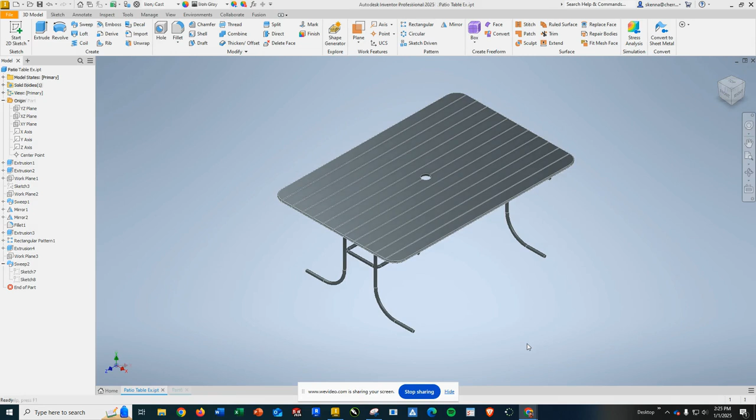Okay, to start out with, we're going to go ahead and start with a new document, and we're going to drop down our origin area, and we're going to use our view cube to look at our ISO view so we see the front, the top, and the right side.

This time we're going to start on the top plane, which is the XZ plane. So that's going to be where we're going to start our sketch.

Okay. Now I am going to rotate my view, that way I have top and I have the front at the bottom of it so that I know where I'm at. So I'm going to rotate it so I can read top upright, and then I'm going to start with a center rectangle.

So 2-point center rectangle. My first point is in the dead center because I will be lining other stuff up with the center as well.

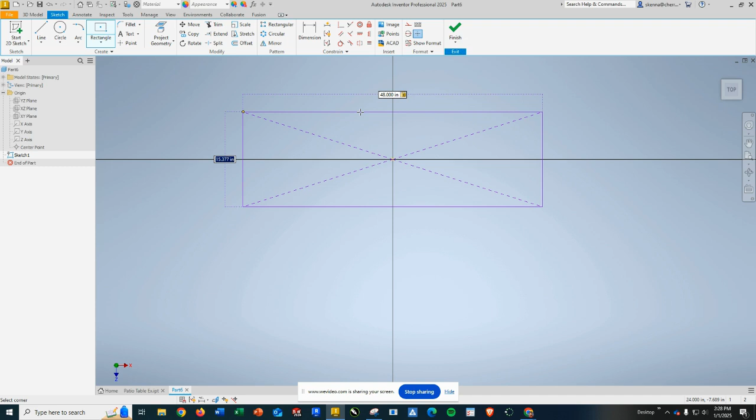Now we're going to go ahead and zoom out some because the width of our table is 48 inches or 4 feet. I'm going to tab over, and the height is going to be 72 inches, which is 6 feet. So that will create our 4x6 patio table top.

The tabletop is what we're starting with. The next thing we're going to do is we're going to use our sketch fillet. So fillet is just a simple way to round corners. So we're going to use our sketch fillet tool.

We're going to set it to 4 inches, and we're going to add a sketch fillet. It doesn't like that, so let me do that differently.

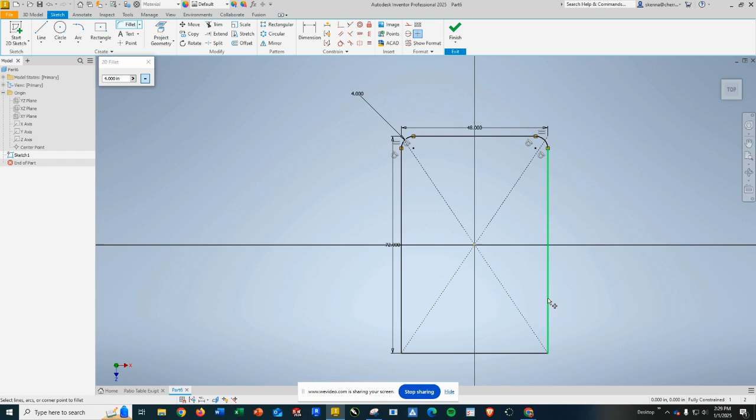We're going to add the two lines that surround each corner, and we're just going to kind of go around in a circle. The nice part is it dimensions it once for us, and that way the rest of them are good to go. So we're going to accept that as the completion of our fillet tool.

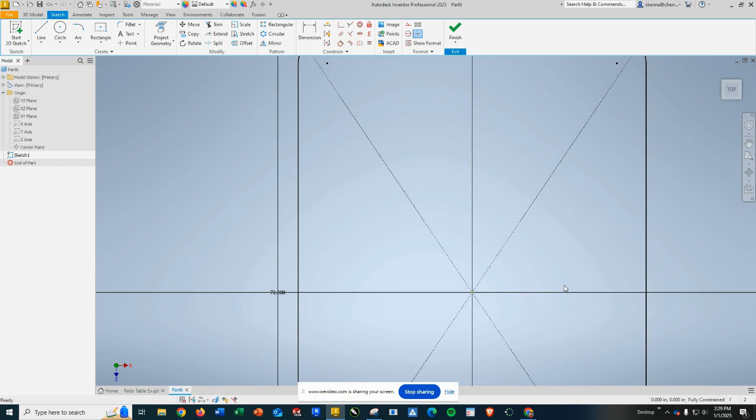And we're going to go ahead and also finish our sketch. Again, it kind of zooms out. I don't know why it picks the scale it zooms to, but it does.

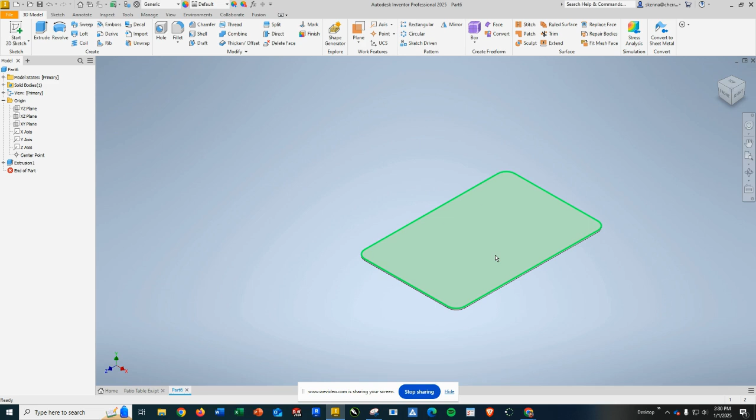We're going to go ahead and extrude in an upward direction. Instead of being 1 inch, we're going to do 3/4 of an inch, which you can do as 3/4 or 0.75. Either way, that is our 3/4 inch tabletop.

The next thing we're going to do is we are going to switch to our YZ plane, which runs through the right, which would also be called the right plane because it runs through the right hand side of that.

So I am going to start a 2D sketch there. And the next tool I'm going to use is I am going to go back to rectangle, but I'm going to go back to a standard 2-point rectangle. I'm going to zoom in a little bit, kind of more to the left side of my screen. And I am going to draw a rectangle starting on the edge.

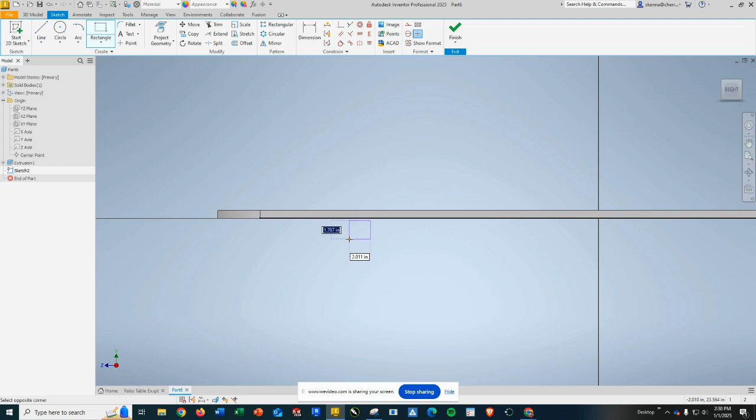Sorry, it was flashing, so I thought that was on the edge, but it is not. So I'm going to hit escape and try again. So we're going to go down to the edge. There we go. And this time, the height of it is 0.75 or 3/4, either way, and the width of it is 3 inches.

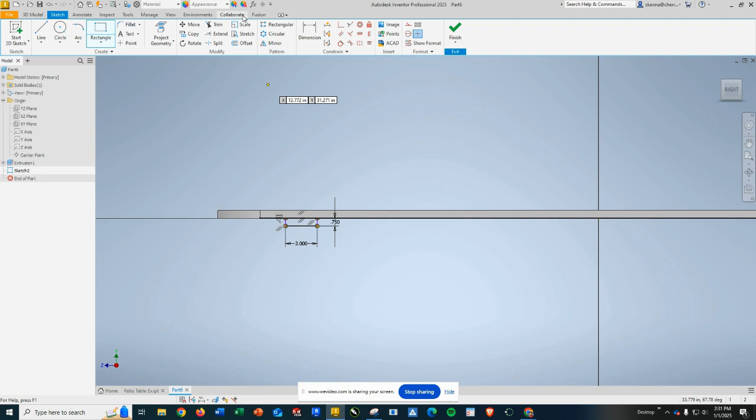Now we're going to get our dimension tool because we're not quite fully defined. And we are going to add a dimension from this corner or the line to the middle, so I can get the midpoint there. So I'm going to add this dimension, and that dimension is 24 inches. So we'll move it in just a little bit.

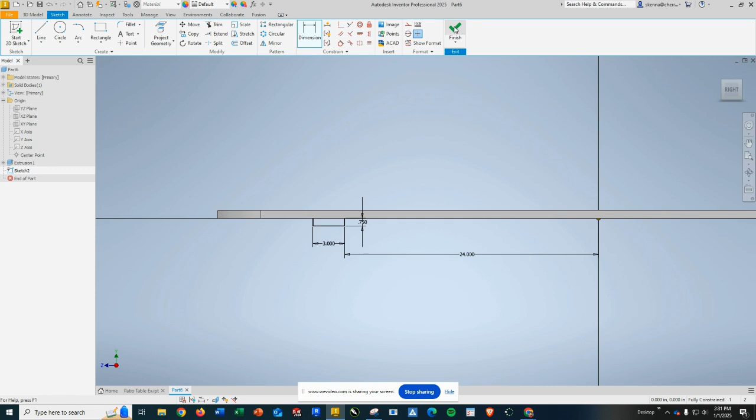Now what we're going to do is we are going to use this to create the support where the legs attach, and we're going to turn this into a slatted table, so those slats would need to mount to something as well. That's the part we're creating right now.

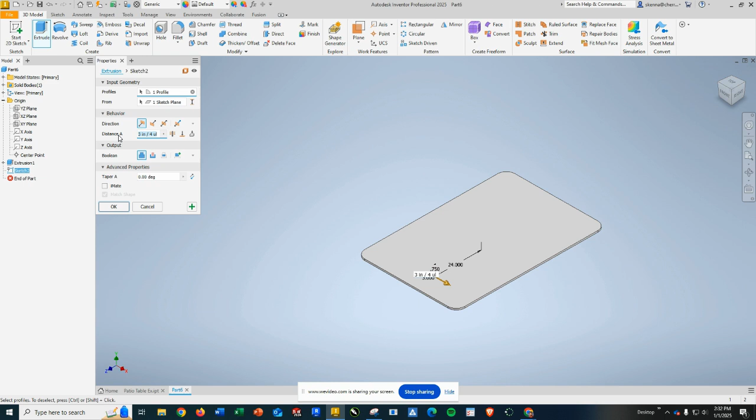And for this, we're going to go ahead and click extrude with it selected. The distance is going to be set - I don't know why it makes the fractions look weird like that, but it does - to 46 inches.

So instead of 48, I'm going to go back and fix that. By the way, if you make a mistake, you can always right click on it and hit Edit Feature to go back to your settings.

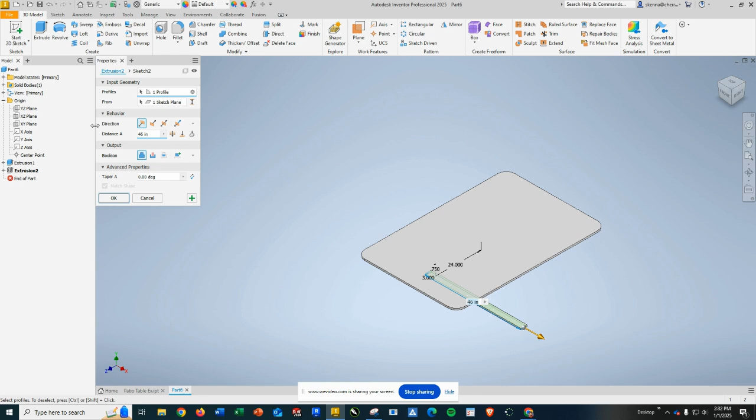46, we'll put it just shy about an inch in from either side of the table. You can see mine sticking out because it extruded only in one way. This is one of those times where we actually want it to go in both directions equally, or what they call a symmetric extrude. In SolidWorks, this is called a mid-plane extrude.

So as you can see, it's going about an inch in from either side, which is exactly what we want. So now I can hit OK, and as you can see, the change has been made. So I have my support underneath.

And we're going to work on just one side, because one of the other tools I'm going to show you that wasn't listed in the title of the video is Mirror. Mirror is a great tool to use when you've got assemblies or groups of features that are the same on both sides. So we'll get to that.

So you don't need to create another one of these - we're on the front side of the table here. You don't need to create another one on the rear side of the table. So what we are going to do, though, is we do need a surface to draw the profile of the table leg on.

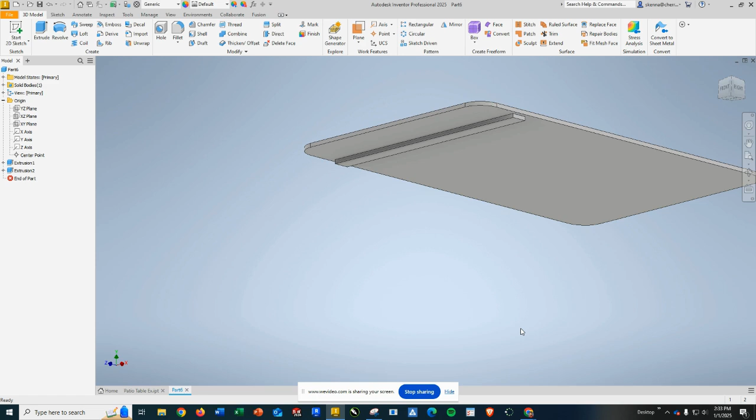And to do that, we are going to come over to Work Features and click the Plane tool. Now, even though it doesn't necessarily prompt for things, what it's looking for is two references or more to use to define this plane. And you'll know that it defined it because the tool will shut off and the plane will appear, and it will also appear in your file tree.

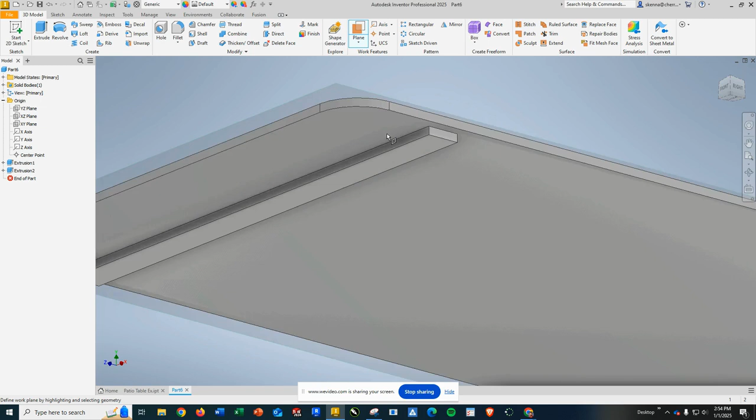It did take me a couple tries to remind myself how I did this the first time I designed this table, so don't worry about it if my numbers don't match your numbers.

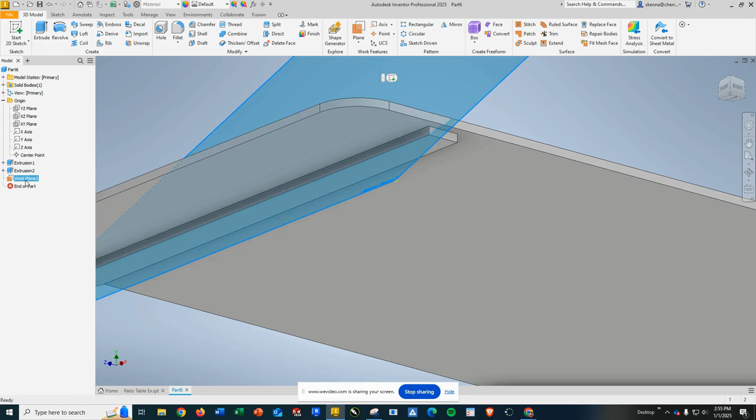So the first thing I'm going to click is one side of the support, and I clicked the wrong side, so we'll undo that, and we'll click this one. And it made me a plane that I don't want, so I'm going to go ahead and try that again.

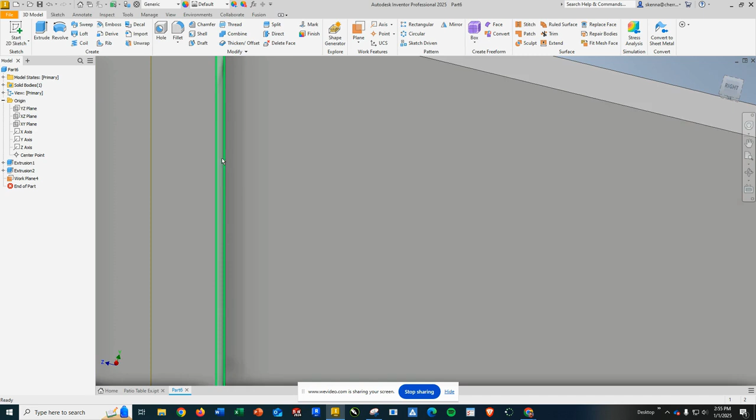So Plane tool, side of the support. I am then going to rotate - I can grab my tool here, I'll rotate this around - and I'm going to click the other side. I'm going to be real careful and go ahead and zoom in the other face of the plane, which created a plane for me that is in the exact center of that support, defined by the support.

So the nice part about doing it this way is if I ever chose to move the leg assembly in or out, I could just change where this table support was created, and the legs would move with it. So that's a real nice feature.

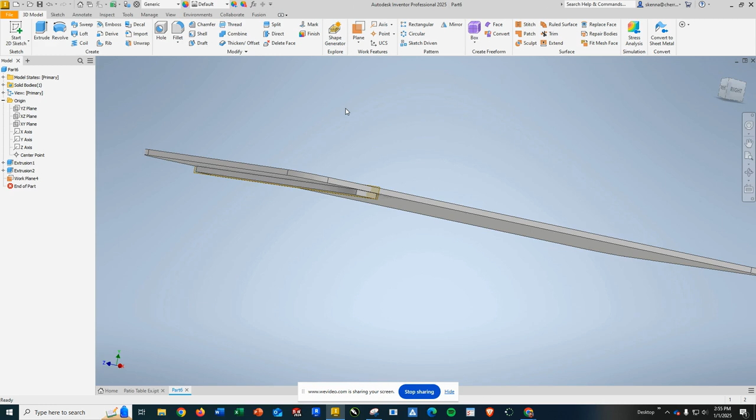All right, so I'm going to go ahead and click this work plane. And again, if your number is different, if you did it right the first time, you won't have a problem. So you can just go ahead and click that and start your 2D sketch.

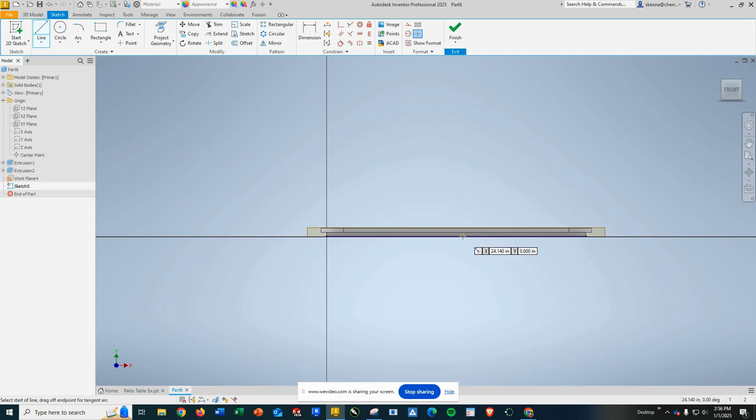I first am going to draw a center line because I want to space this off of the middle. So I'm going to go ahead and grab a line tool. I'm going to get on this line and slide over till I find the defined midpoint, which should be right in the middle somewhere. There we go. I knew it was there because it said the 24 inches, and I am going to draw this down.

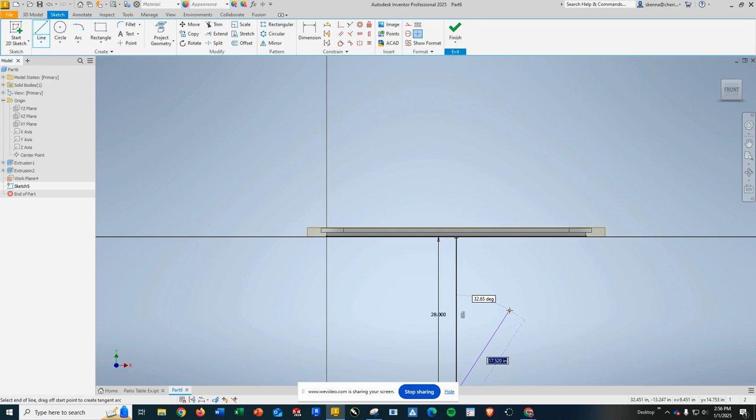The overall height of my leg from point to point, which is 28 inches at 90 degrees, which is perfect. All right, and then I'm going to go ahead and click the line, and I'm going to change it to be a construction line, so it is dotted. That is perfect.

Now we're going to be kind of back and forth with some tools here as we draw this profile. So we're going to be switching between line and tangent arc. So we're going to go ahead and grab our line tool.

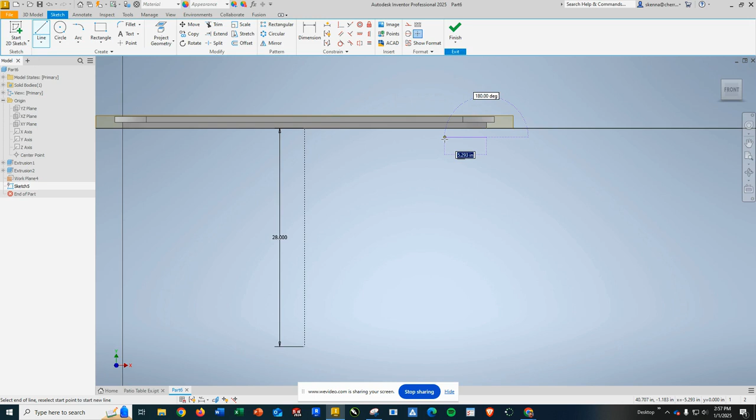I'm going to start straight below this edge. Draw this over - make sure you're going horizontal - and we want that to be 9 inches. I'm now going to switch to my tangent arc.

Click my line here and just kind of draw a tangent arc. I'm going to get close to 90 degrees. Doesn't have to be perfect.

I'm going to go ahead and start my line. I'm going to click on the end of that. This does need to be perfect, so we do want it to be straight vertical because we're going to use it to define our arc there. But this needs to be a 12-inch line.

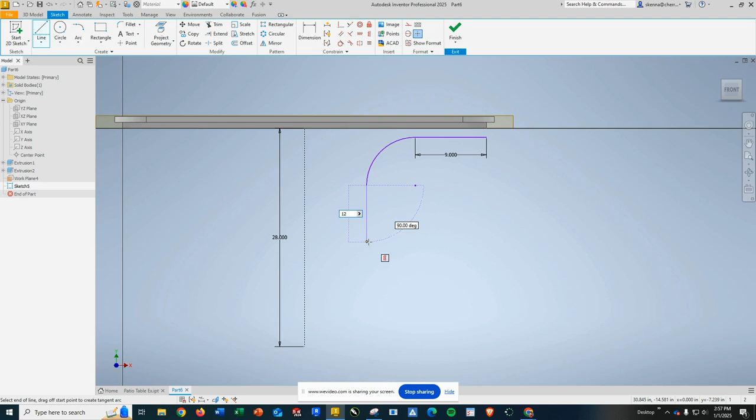Next, we're going to switch to our tangent arc. Click that same line, come around again, 90-ish is fine. We're going to get our line, and we're going to get on the end of it, and we're going to come out, make sure we're horizontal, 7 inches.

Now we're going to apply a few different constraints to our thing here. So just to be clear, when you click on the arc right now, it's only tangent at the top. We want it tangent at the bottom as well. This one, again, it's tangent where it started, but not where it ended. That's probably a better way to say that.

So I'm going to start my tangent option, and I'm going to go from arc to line to add that tangent at the end. And again, down here, arc to line to add tangent at the end.

Once that is done, I'm going to go ahead and click my vertical constraint. I want to put a vertical line between the end of the support and the start of the profile. I am also going to grab a horizontal and put the end of my construction line horizontal to one of the endpoints of this lower 7-inch line as well.

With that, I am going to dimension from the center line over and set that at 6 inches. And it's going to tell me one dimension needed.

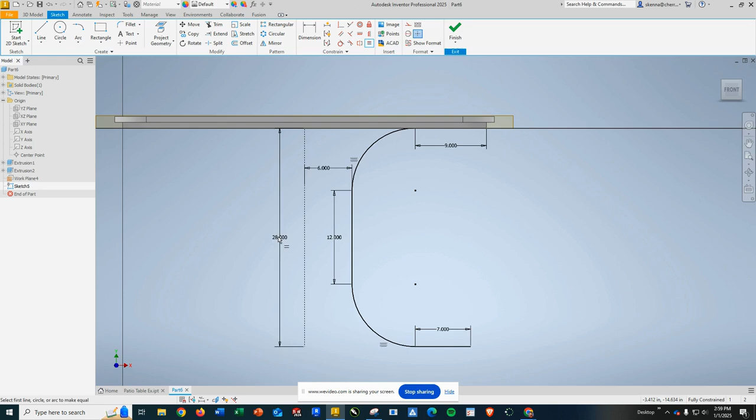Now I am missing something, and it was an incorrect measurement on my part. So in order to fix a measurement, let me get out of the constraint. If you double click on it, this was not supposed to be 28 inches. This was supposed to be 28.5. So lucky for us, we found out how you go back and correct a measurement.

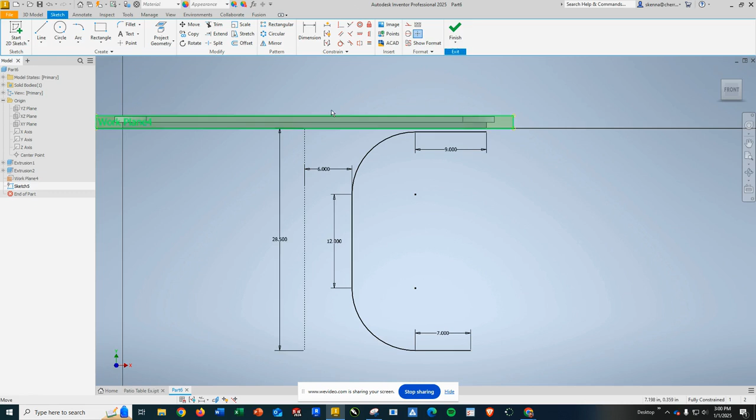So with that, that should leave us this profile fully constrained in what I'm going to call the easiest way possible. There would have been some measurements we could have added that would have done the same thing, however, this is the easiest way possible. Now I'm going to go ahead and finish that.

I am going to add another work plane because I have to be able to draw 90 degrees, or perpendicular, to this line at the very end of it. So when I click my plane, I'm going to click two things: this line, and the point there. And it added a work plane for me that is perpendicular to the line at the end of it, which is perfect and exactly what I want.

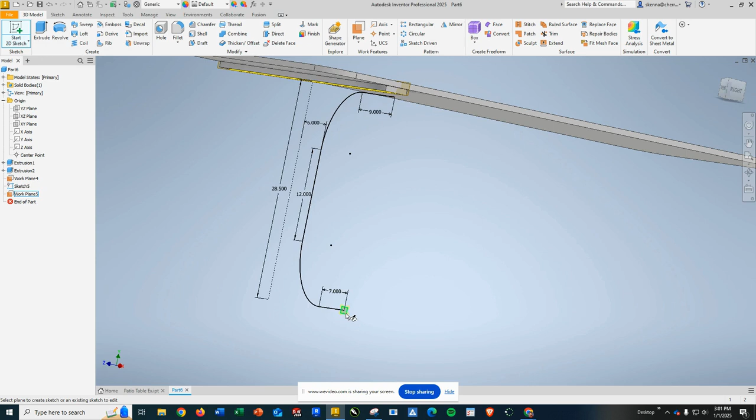So the next thing I'm going to do is start a 2D sketch again on that plane, which I'm going to zoom in on. So sketch 6 is on that plane. I'm going to go ahead and grab my tool, and we are going to go on the very end of this line and draw a 1-inch circle.

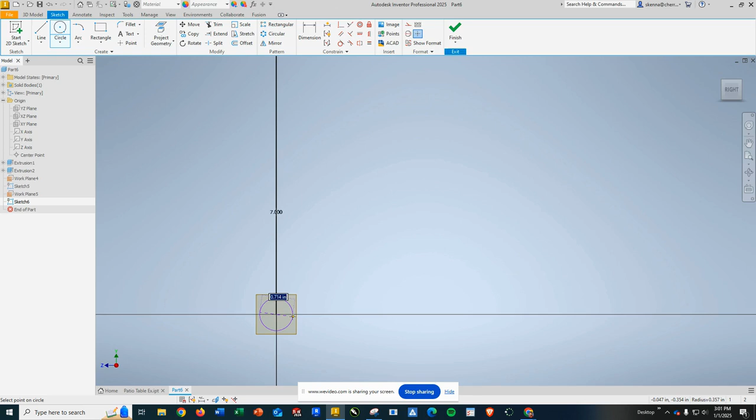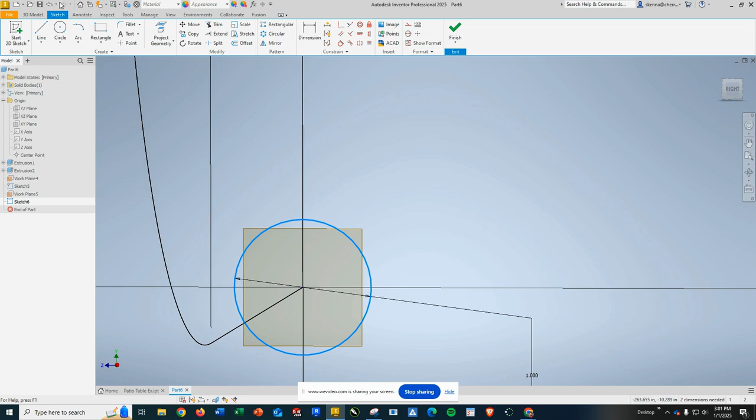Which should be fully constrained just by itself because, again, I created it right on there. We're just going to angle this and make sure, yeah, the center point should be on the center point of the circle. So that is good to go there.

We'll go ahead and finish that. And we're now going to use a tool called Sweep. What Sweep does is it takes a profile and moves it along a path, just like it shows you when you hover over it. So when I go Sweep, the first profile is already selected because I had just drawn that sketch.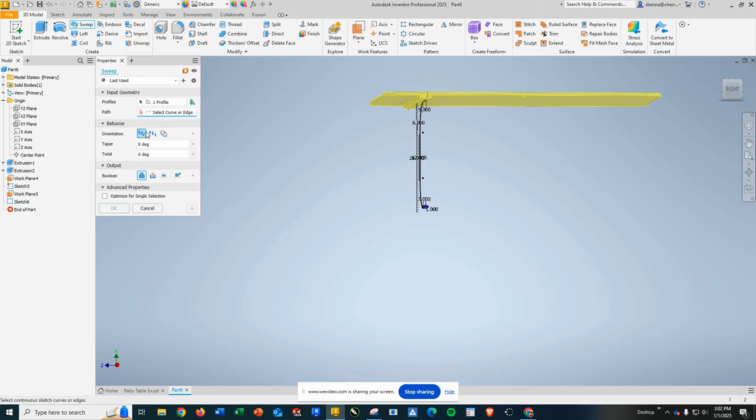Now, when I select curve or edge, I should be able to rotate my view and pick this path right here, and you should get a green preview of it. We do want to make sure it's adding, because that way we know it's touching up at the top there, and it's got 5 curves. I really don't need to worry about taper or twist or any of that sort of stuff, but it's going to add the leg as I need it.

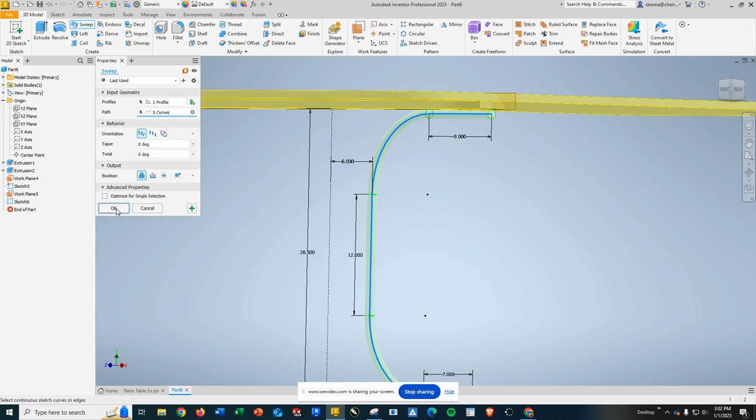So now my table leg is there. It is this nice, really cool leg, and there's a ton of stuff you can do with the Sweep tool.

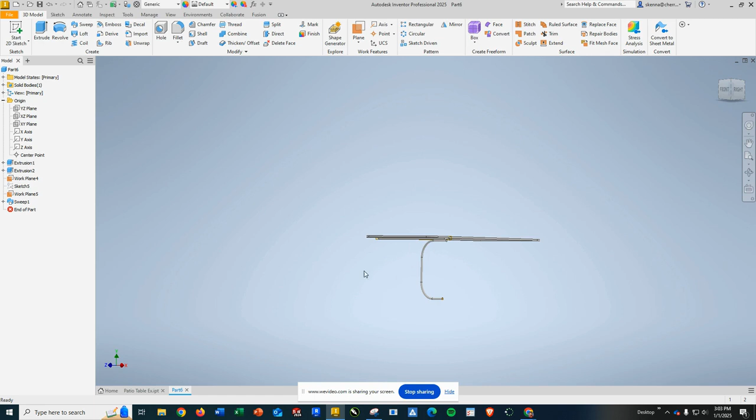So I'm going to take a quick peek just so I know. I want to figure out which plane it is that runs front to back. It's the same plane I drew the profile for the support on, which is this plane right here, which is my YZ plane. And again, that's important to know.

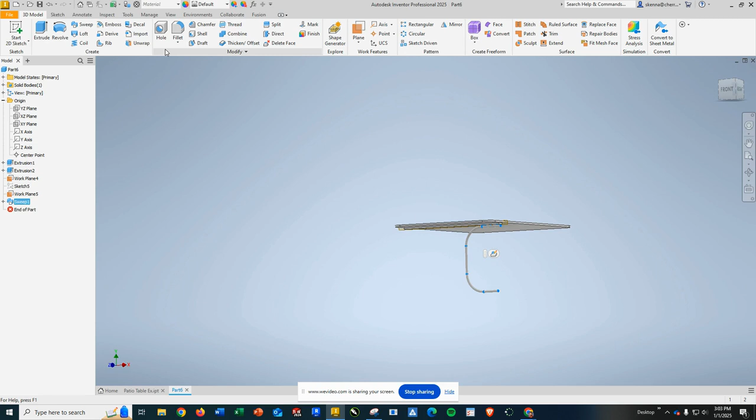So I'm going to have my sweep tool highlighted, and the feature that I want is mirror, and it's over here in the pattern section. So I'm going to mirror, and I can actually then pick, because I already have features chosen, it's now asking me to pick the mirror plane. So I am going to pick, I even forgot which plane it was supposed to be, the YZ plane.

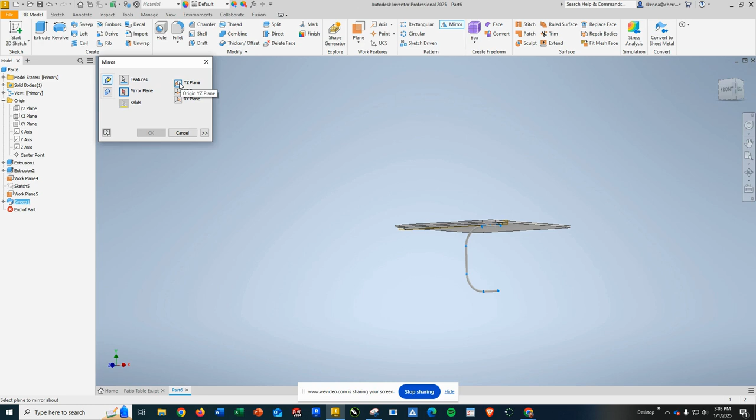And then I'm going to click OK. And now I've got those two on that correct plane.

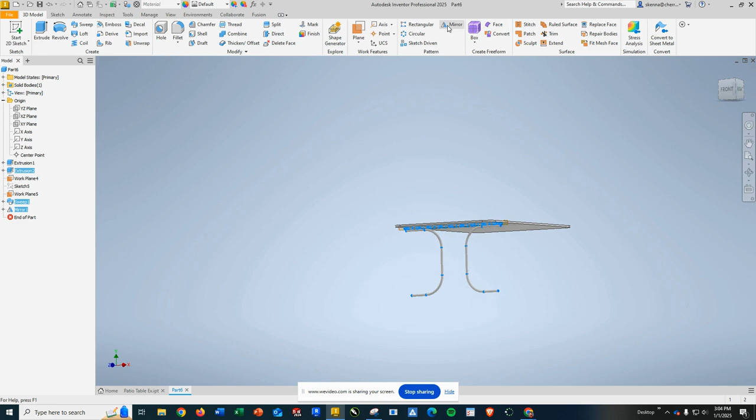The next thing I'm going to do is highlight a few different things. I'm going to highlight extrusion 2, hold control and highlight sweep 1 and mirror 1 to select all of those. My XY plane is the one in the center from front to back, so XY is my mirror plane. I'm going to select those three things, click mirror, and my mirror plane is the XY plane.

So it shows me a rough idea of what I'm going to get, and I'm going to click OK. And now, with a couple of quick mirrors, I've created the majority of my table here. I've got the supports on both ends and all four legs created. The nice part is if I want to make a change, I can go back to one or two sketches and the whole table changes. So that's a great thing there.

Before I do the things to finish the tabletop, we are going to fillet all of the edges of this tabletop. As you can see, once we divide it up into slats, that would be real hard to do—well, it wouldn't be hard, it'd just be a lot of extra work.

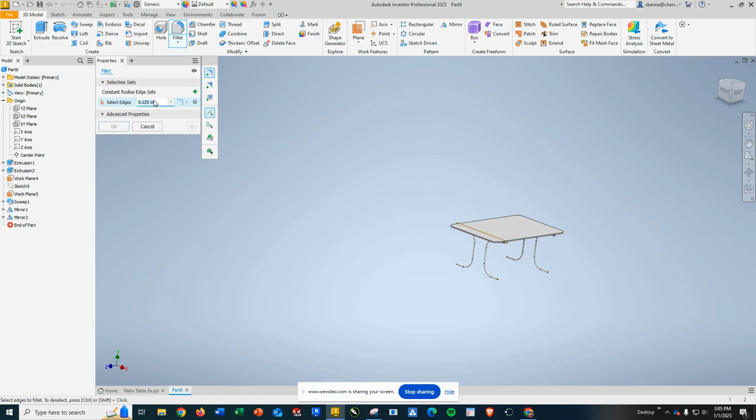So what I'm going to do is go ahead and click the fillet tool, and the radius we're going to set is going to be 0.125.

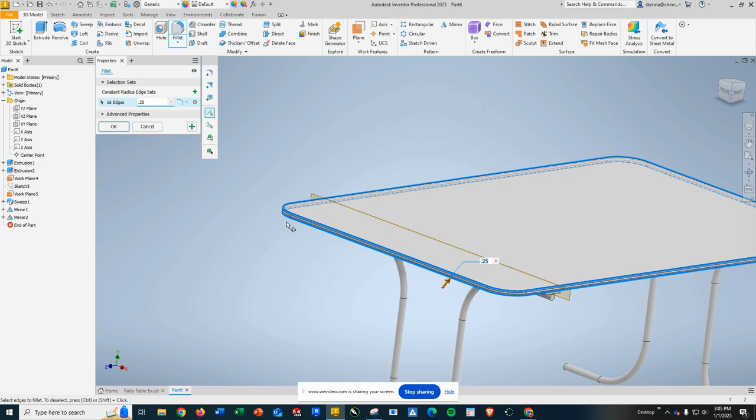Now I can start selecting things. I should be able to select the top edge and the bottom edge of my table. And when I accept that, you'll now see that my edges are all rounded. Even when I divide that up into slats, my edges will all be perfectly good to go.

Now, in the next step, we're going to divide it into slats to give it that patio table look. So I'm going to click on this surface and start a 2D sketch.

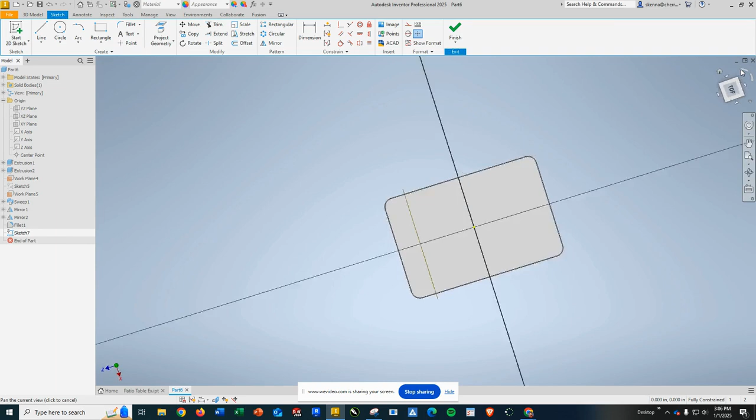Again, just for the sake of doing stuff similarly, I'm going to rotate this up and down. I'm going to take my rectangle tool and draw a rectangle approximately in the right spot, but I'll come back and dimension everything anyway. So I'm going to draw it around where the arc, that 4-inch arc, meets the end.

So I'm going to go ahead and dimension this because I do know the sizes. The dimension is going to be 73 inches long, so it overhangs. Oh, that's the wrong dimension there. This gap is going to be a 1/4-inch gap, so we'll call this 0.25. And when I hit tab, I can get 73.

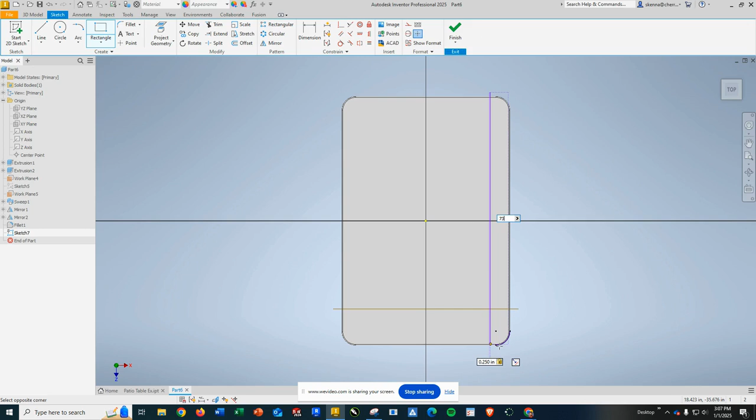So that is that, and all I need to do is add a couple of dimensions up here. I'm going to zoom in and grab my dimension tool. From the top edge, either point or line, to this line, I want a vertical dimension of 0.5. Since I made this an inch longer than I need, now part of it sticks out on both sides, just to make sure we're good to go.

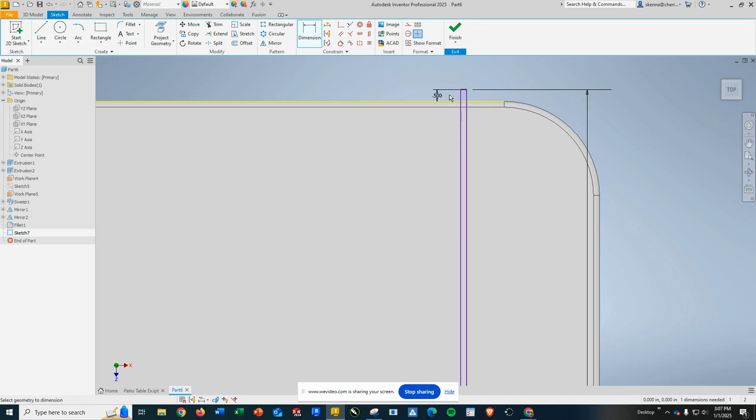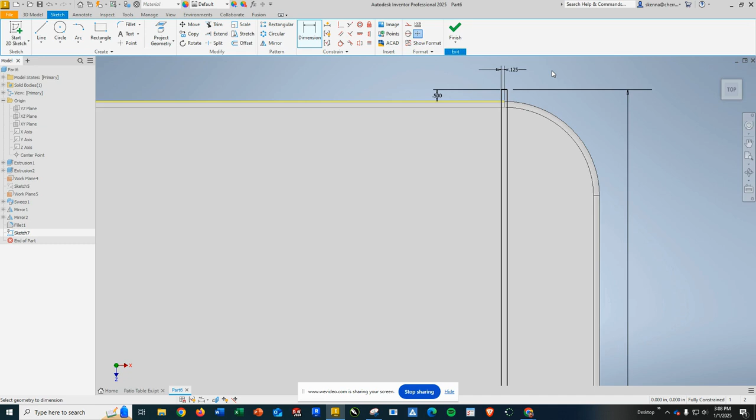My next dimension is going to be from the far line to either this point or that edge. This dimension is going to be half of our 1/4 inch dimension, so 0.125, which puts it centered right where that goes. Now, as you can see, I've got it, and it goes all the way down and across and will give me a complete cut through.

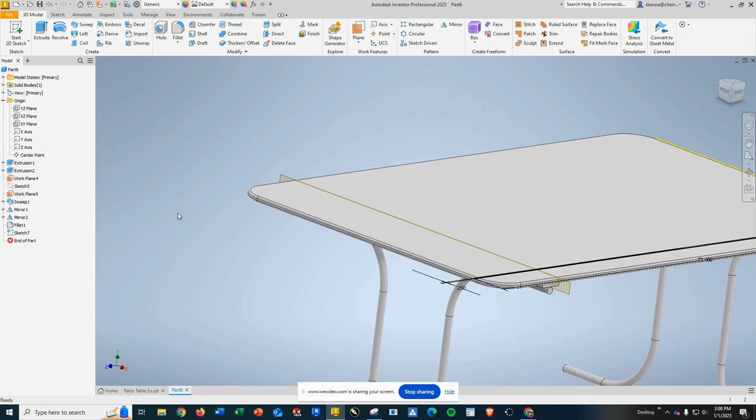This is, again, one of those things where I'm going to do this once and then have the software do the rest for me. So once I'm done with that, I'm going to go ahead and click Finish. With the sketch still active and selected, I'm going to click Extrude.

Now I've got some changes to make because the first thing is this is not going to be adding material, I'm removing material. I'm making a cut. So down here where it says output, I'm going to change to cut. Now it starts to go downward, wanting to go for the whole distance. The last time I did an extrude, it was a 46-inch extrude, so it's now wanting to do that.

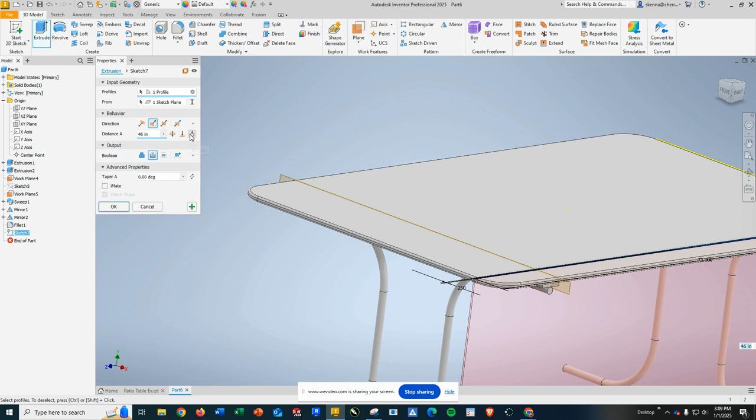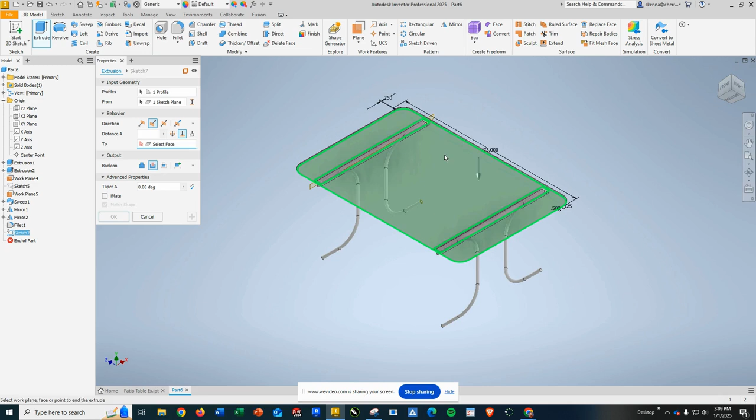Now, instead of giving this a definition, I'm actually going to click the To selector, which now lets me rotate this. Since I drew it on the top and don't want it to cut through my supports, I'm going to move around to the bottom side and say to this surface. So it's going to cut down. And if I swing back around to the top, I can zoom in and see it's going to cut down through this part of the table, but not into the support.

And at that point, everything's fully defined, so we're going to go ahead and click OK. You can see I've separated my first slat. Now with this extrusion 3, unfortunately it doesn't call it extrude cut like some other software does, but we'll move on with that.

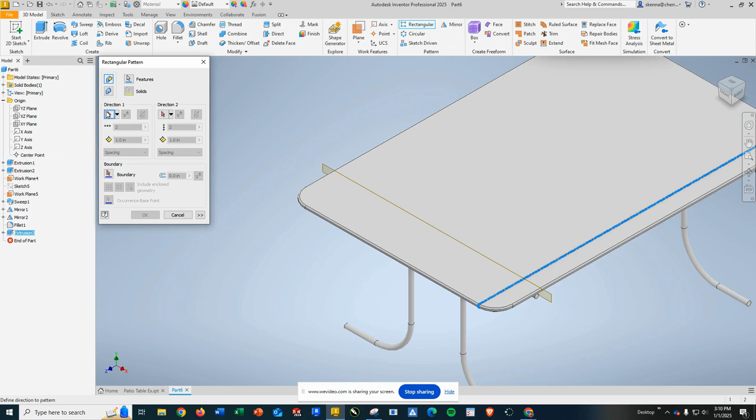So my next thing is I'm going to create a rectangular pattern. Now rectangular just means in a line, it doesn't mean you have to necessarily make copies in 2 directions. So I'm only going to use the direction 1 settings, going across the table in the short direction. I'm going to pick any of the lines here, doesn't matter which edge I pick, it's going to go in that direction.

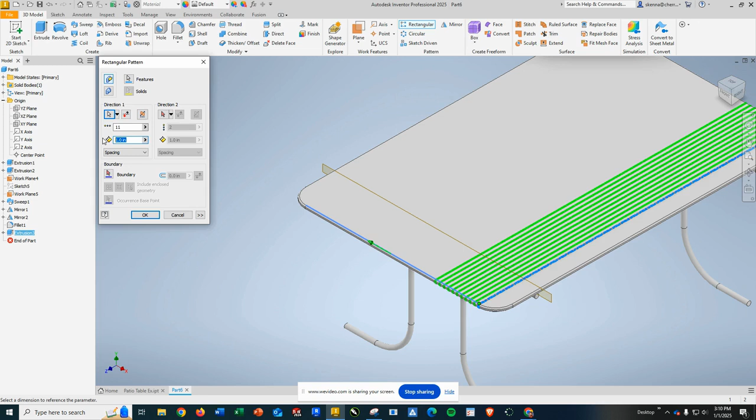The next things I have to set are how many of them we're going to create. I've already done the math for you, so you're going to create 11 of these. And I know that the spacing is going to be 4 inches, which creates them all the way across so that they are all equal. We're going to click OK, and as you can see, it cuts all of our slats for us.

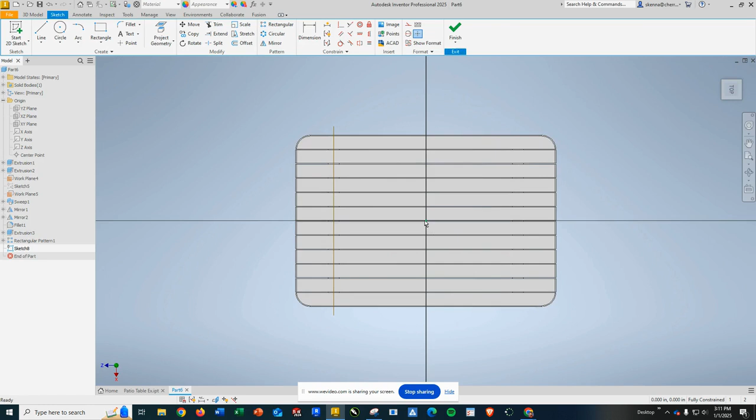Our next thing that we're going to do is I am going to click on the tabletop. It doesn't actually matter if you click the perfectly right surface, because all you're doing is defining a surface in space. So I'm going to click there and start a sketch. As you can see, I have my normal origins, which are right in the center of a cut.

I'm going to grab my circle tool, put the center of the circle right here, and make a 3-inch circle. It is a fully defined 3-inch circle, which is perfect, which I am going to accept.

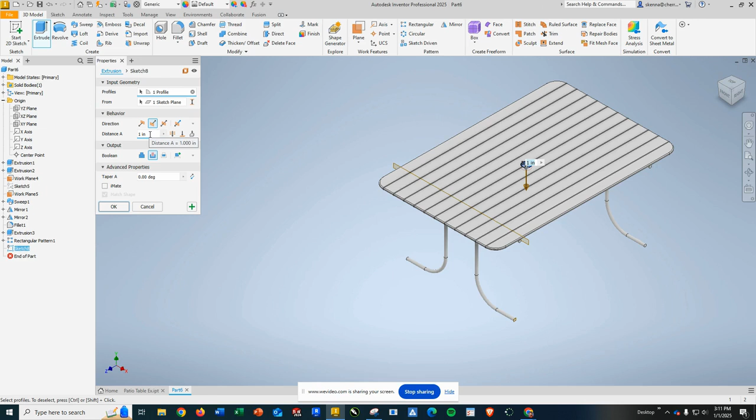And then I am going to extrude. I am going to change it to be a cut. And again, I can type in a distance, I can type in a selection, it doesn't matter, there's nothing below this, there's not going to be something below this. So I'm just going to leave it at the stock settings, which cuts what we would normally refer to as the umbrella hole in our table.

So the last thing that we're going to add is the leg support. This is to get us working with the plane tool a little bit more, because sometimes we need to create planes in different ways. So there is a drop down on plane, and it usually likes to just, if it's a simple plane, if it's something that's in the middle of 2 surfaces or something like that, you really don't need to delve into all the stuff underneath. But when you drop this down, you've got a lot of great options here that might give you what you want.

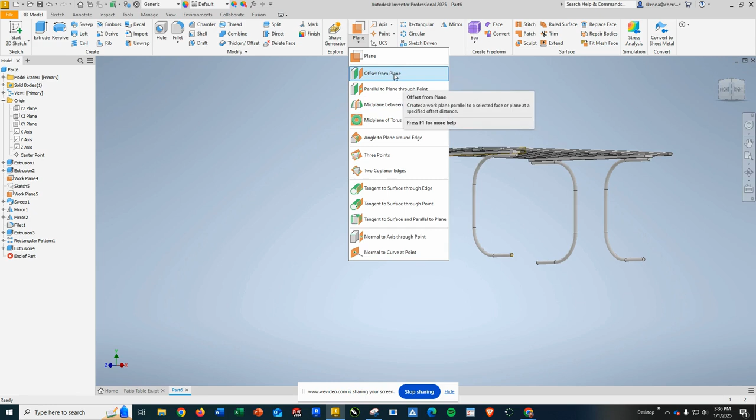So in this case, I'm going to go ahead and use the offset from plane creation tool. We're going to click offset from plane. The first plane that we're going to click is the XZ plane. That's the one we started off with, the one that faces the top of it.

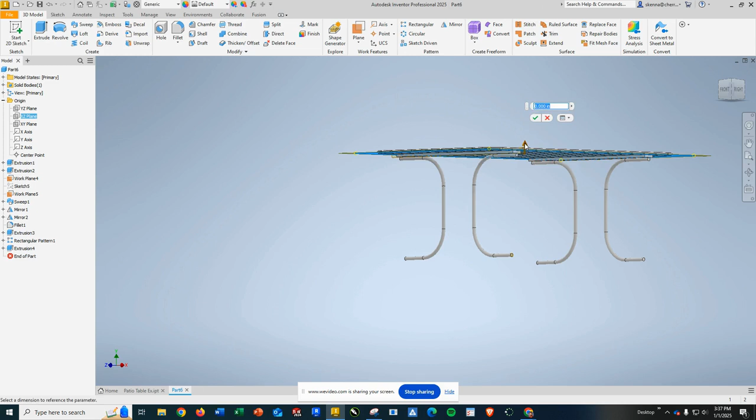So when I click that, it gives me the opportunity to set a distance. Now, it always wants to go up, okay? And if you bring it down, you'll see that your numbers have a negative sign on it. So the measurement we want to use is negative 14.75, which seems pretty random, but kind of puts it in this area, kind of in the middle-ish of the legs. And so that's where we're going to create our plane. I'm going to click OK, and as you can see, it creates our plane.

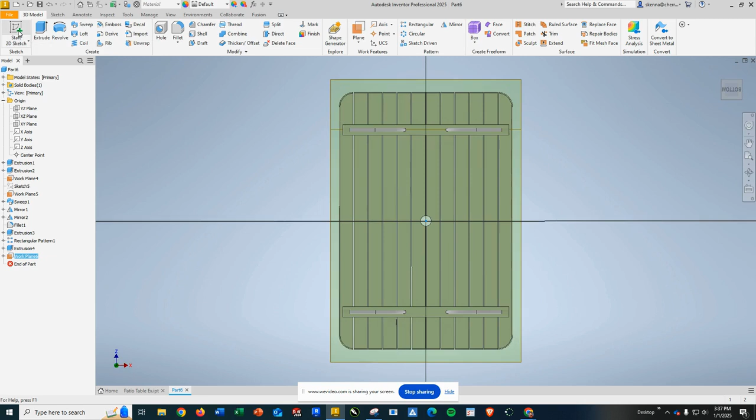And now that is a surface we can draw on. So with that plane selected, I'm going to go ahead and hit Start 2D Sketch. Now, I want to look at it from the bottom so that I have the reference of where the legs are, which is a great thing to have. I'm going to go ahead and grab myself a center rectangle.

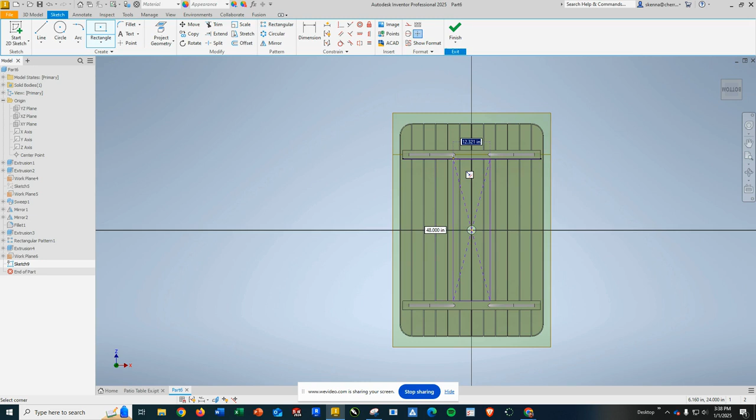I'm going to put that in the middle and bring it out onto that surface, clicking so I can add relationships. As you can see, I came up just shy of this. I hope I didn't accidentally put it... oh, I did. Part of that is defined, and I didn't want it defined, so I'm going to undo it and do it again.

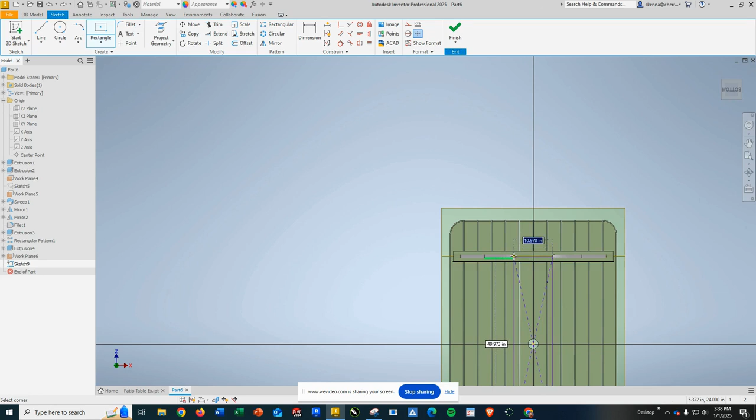This time I'm going to zoom in a bit so that I make sure I am not putting it right on that edge. I'm going to put it on the lower side of that edge. And as you can see, now all my lines are blue.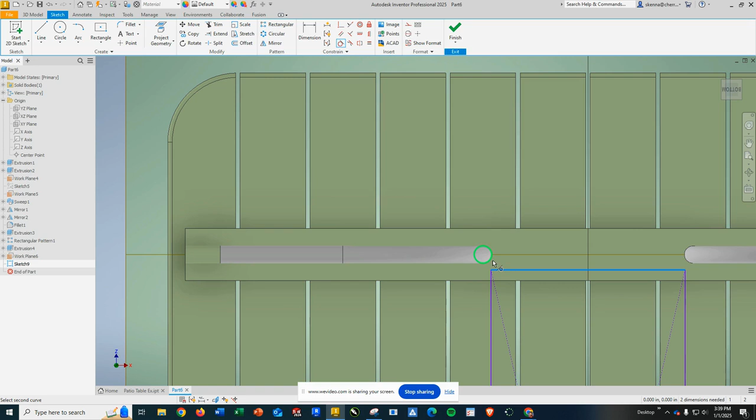I am going to add a tangent relationship between this line and the circular part, which gives me this. Next, I'm going to hit my dimension tool and dimension this length at 12 inches, which puts it kind of touching the thing, which is fine.

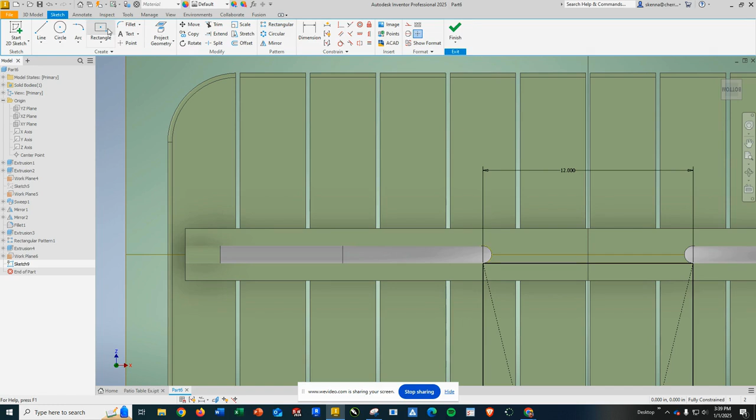Next, just like I did when I built the tabletop, I'm going to use the Sketch Fillet tool to round all the corners, at 1¼ of an inch. I'll click the Fillet tool, set this at 1.25 - if you hit enter, like I just did because you're used to SolidWorks, it gets out of the tool. So just 1.25, then I click my two lines up here and my two lines over here.

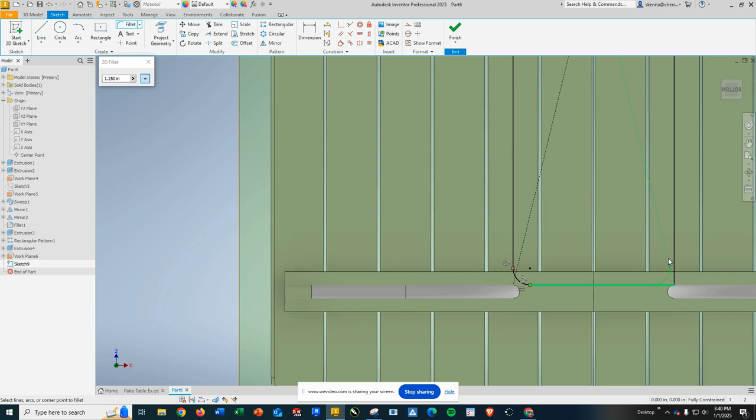To get this end, I'm going to zoom out, zoom in down here, and again go line, line, and line, and line to get all the way around. So this is the profile - we're going to use sweep again, so that is the profile of what I needed to create. I'm done with my fillet tool, and I am done with this sketch.

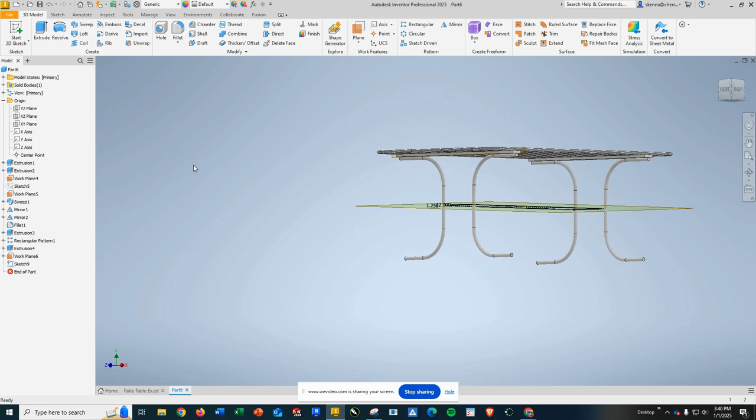Okay, so we can see it on there. Now I have a plane that already crosses it, so I don't have to create one. I'm going to click on my XY plane and start my sketch. Now I'm going to angle my drawing a little bit so you can see what's going on.

As you'll notice, when I get my circle tool, there's nothing on here I can click to make sure the center of my circle ends up on this line. There's no reference, so I'm going to hit escape real quick and use project geometry. When I click project geometry, I'm going to find an endpoint here along this line.

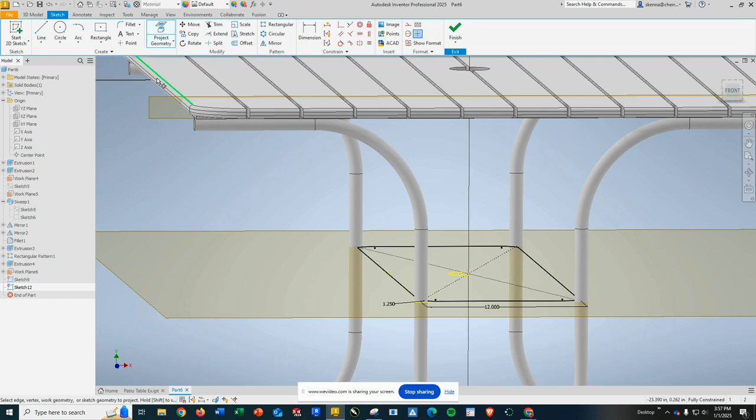What you should see now, after I get out of the tool with escape, is when I zoom in, there's like a little yellow crosshair right there. I've just projected that point onto my current drawing plane. So when I grab my circle tool, I'll be able to find that point where it locks onto it and draw a 1-inch circle. As you can see, it turned black - it is fully constrained because it is on that projected point.

There's some other software, like SolidWorks, where that process is a little easier - the line would already exist, and I could use a Pierce relation. There's other ways to do it, but this is the simplest way in this software.

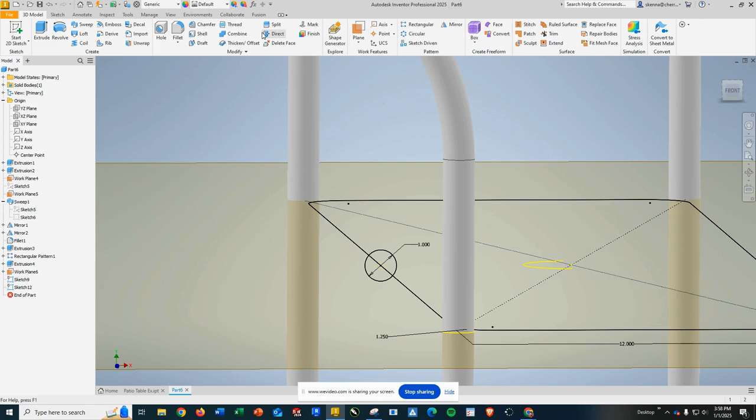So now that I have both my path and my profile, I can switch over to 3D Model, finish my sketch, and pick sweep. Select profiles - in my case it's sketch 12 because I had to try a couple things. And that is this.

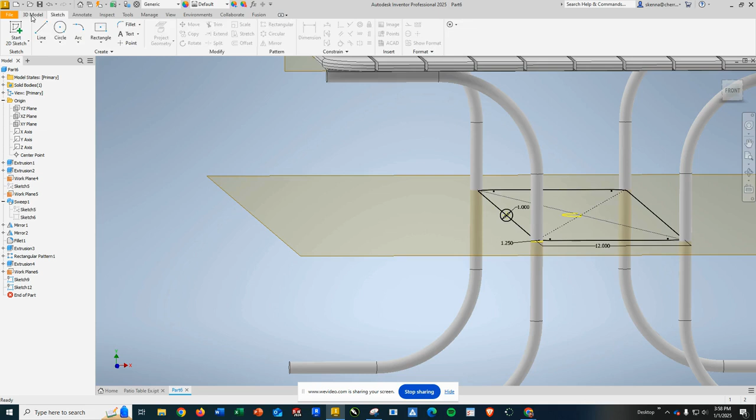It's not wanting to select stuff, so let me try that again. Make sure I'm out of everything, go back over to sketch - yes, that is closed. 3D model, we're going to try sweep again. Select profiles - yep, this time it lets me select it. I'm not real sure what was going on.

So the profile is the round one, and then the path is - select curve or edge. Yep, there it goes. Again, I don't know why it wasn't liking that, but I did select it.

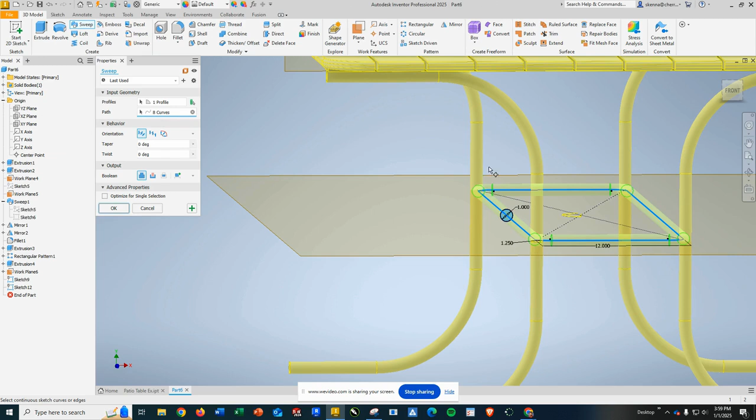One of the things you'll notice is it does kind of blend into the leg, which is good - that's creating our attachment point. Once it's done that, again we're going to add it, hit OK, and now we've got our table leg surface. And this is our table completely done. I know it's been a long tutorial, but this is it all the way done.

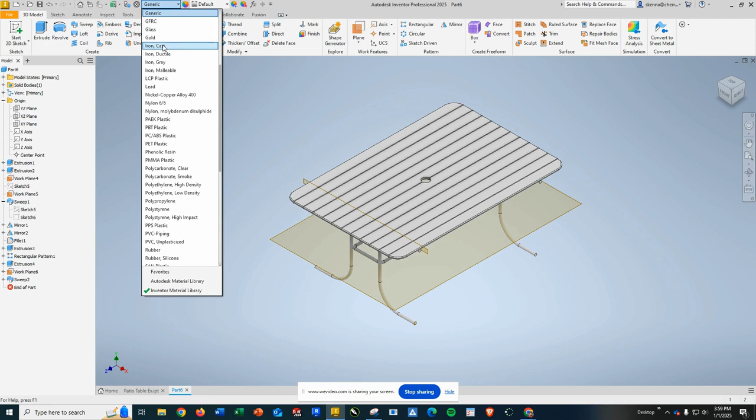The first thing I'm going to do is go to my materials and select iron cast as the material, and it should already put iron gray as the appearance. The beautiful part about that is when you go to the information on this, it should already be there.

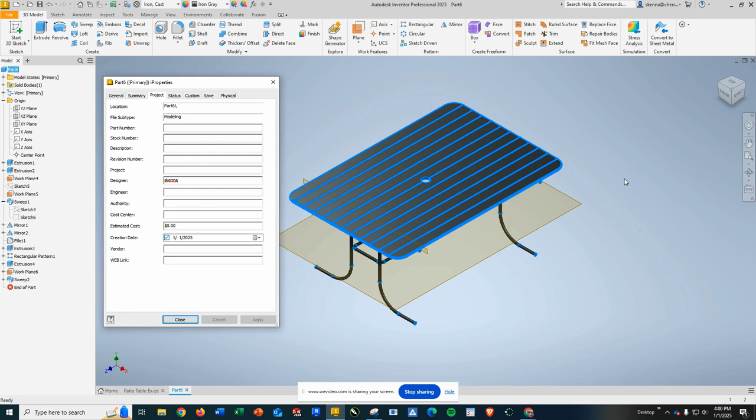Don't forget, when you go to your iProperties, take your image with the project tab open, then make sure to move this so we can see everything, and go ahead and take your screenshot, turn it in, go to the physical part of it, and give us the mass. Good job.